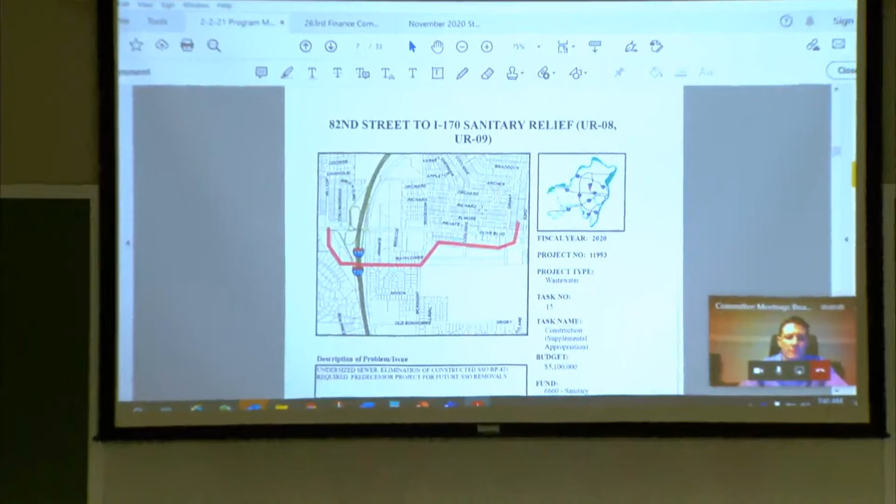The first item on the agenda will be a request from staff for introduction and adoption of this ordinance for the 82nd Street to I-170 sanitary relief. This item appropriates additional funds on an existing construction contract with J.H. Barrett Construction. The work being constructed is approximately 5,900 feet of sanitary sewers, 15 to 30 inches in diameter. The purpose of the project is to reduce inflow and infiltration in the University City watershed, reduce building backups, and relieve overcharged sanitary sewers. The project will eliminate one overflow and provide for the elimination of 4 additional overflows. This is a supplemental appropriation.

During actual construction of the project, the district design staff made a request that the upstream portion be lowered to accommodate a future project that will allow for elimination of other overflows. It was discovered during design that there was going to be an elevation conflict, so we made that request. Unfortunately, deepening of the sewer also deepened a tunnel, and when we dug the bore pit for the tunnel and started tunneling, we ran into rock and some mixed face soil conditions, which added to our cost on the project. The project's ongoing, at the location near the Interbelt and Olive, a very congested area.

We're asking for introduction and adoption, and for the appropriation of an additional $250,000. That $250,000 will bring our total appropriation for this project to $10,650,000. Are there any questions?

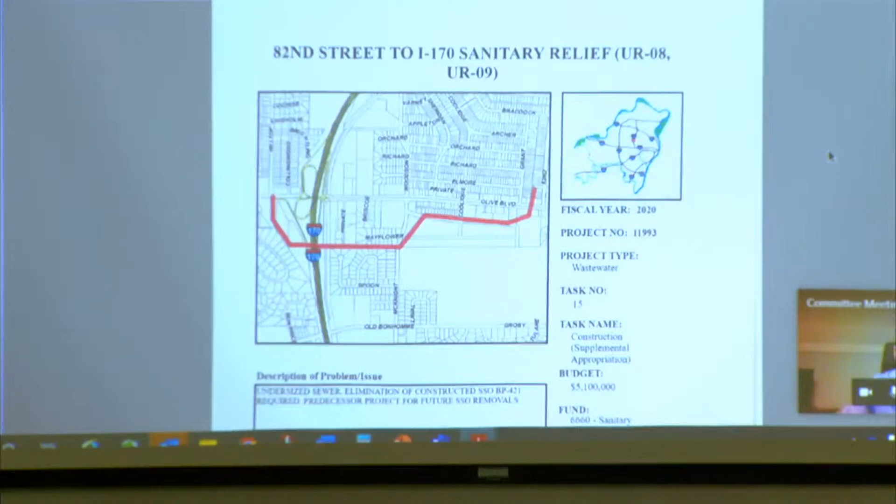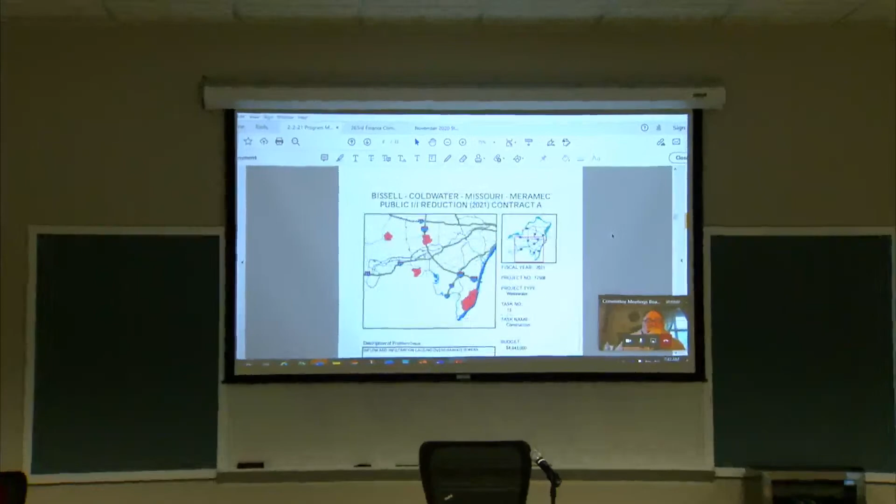All right, thank you. The next item is the Bissell Coldwater, Missouri Meramec Public I&I Reduction Contract A project. This action appropriates funds and authorizes staff to enter into a construction contract. The work will consist of the rehabilitation of approximately 63,000 linear feet of sanitary sewers, 6 to 18 inches in diameter, using the cured-in-place pipe method. We'll be rehabilitating 76 manholes, approximately 1,000 service connections, and making 30 point repairs on the sewer. The purpose of this project is to reduce inflow and infiltration in the Grand Glaize, Fishpot, and Fenton Creek watersheds. The district received 2 bids for this work. The low bid was received from SAK Construction. The bid was below our designer's estimate, and our appropriation of $3.1 million was below the budget for the project.

Most of our CIPP projects are funded with state revolving fund loan funds, which requires MWBE participation of 10% minority and 10% women. In this case, SAK is committed to over 20% participation from the firms listed on the write-up, which meets our 10% goals for the project.

Are there any questions? Hey Rich, the appropriation's 3.1 million, correct? Yes, did I say something? Okay, I just wanted to clarify, just to make sure. Apologize. Any questions?

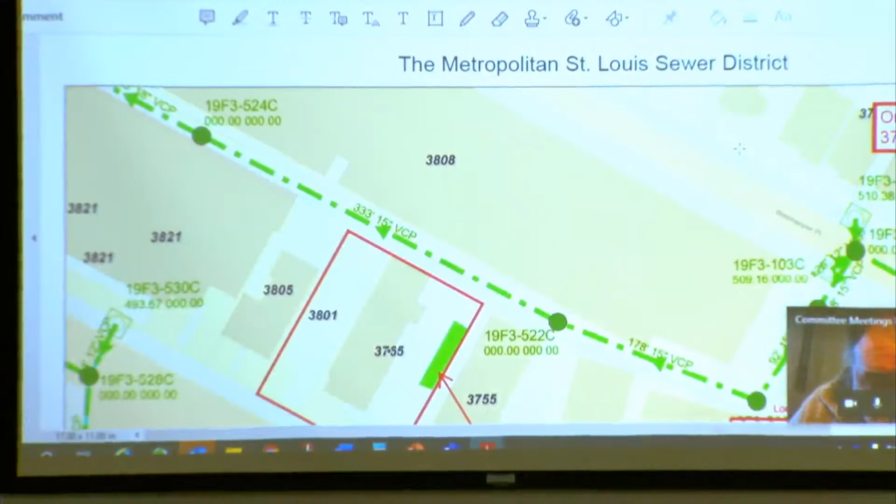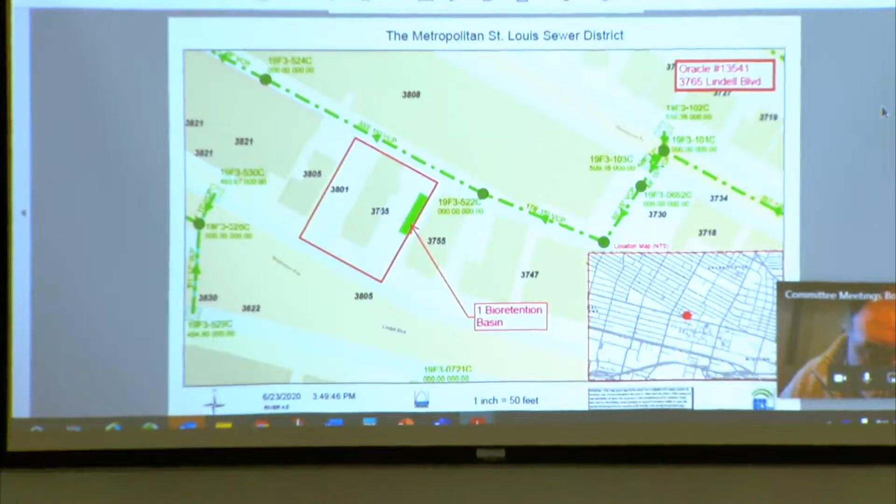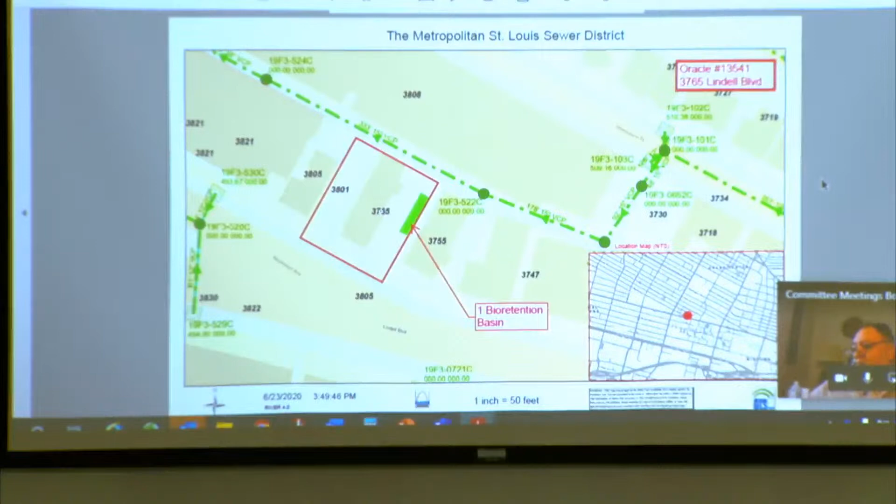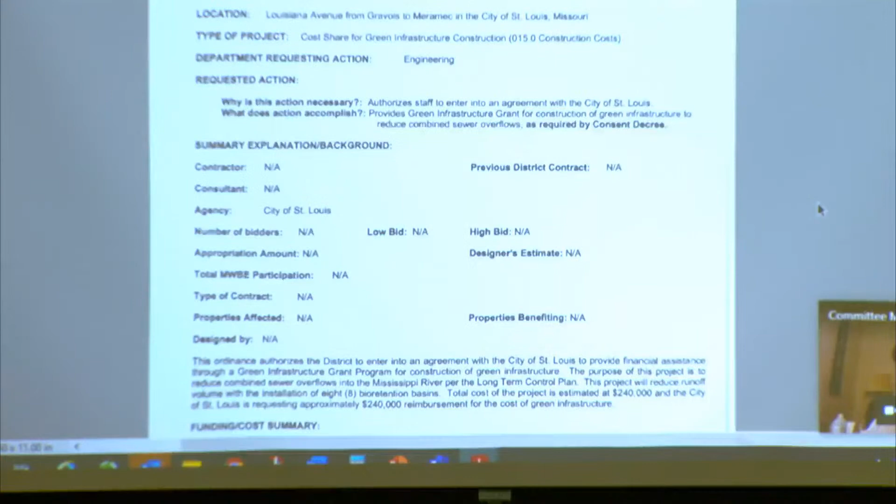All right, the next item is a CSO green infrastructure, Louisiana Avenue, Calm Street. This ordinance authorizes the district to enter into agreement with the city of St. Louis to provide financial assistance through the Green Infrastructure Grant Program for the construction of green infrastructure. Again, the purpose of the project is to reduce combined sewer overflows to the Mississippi. This project will reduce volume with the installation of 8 bioretention basins along this length of street. The total cost of the project is estimated at $240,000, and the city of St. Louis is requesting approximately $240,000 reimbursement for the cost of the green infrastructure.

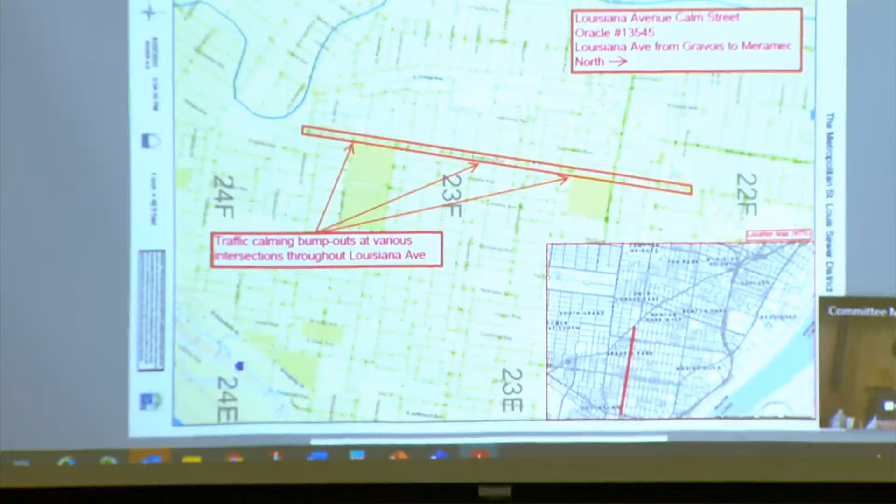Again, on the document provided, this is a calm street project that the city of St. Louis is doing on Louisiana. It goes from Meramec Street to Gravois, quite a long street. With the project, they're going to be building a total of 8 bioretention basins to capture stormwater runoff, again reducing the stormwater runoff to our combined sewer system on that street.

The next item is the CSO reduction green infrastructure Mill Creek Flats project. This ordinance authorizes us to enter an agreement with Mill Creek Flats LLC for financial assistance. Again, the project will reduce combined sewer overflows to the Mississippi River. The project will reduce the volume by the installation of 2 bioretention basins, permeable pavement, underground infiltration, and including a green roof on this project. The total cost of the project is estimated at $370,000, and the owner is requesting approximately $273,600 reimbursement for the cost of the green infrastructure.

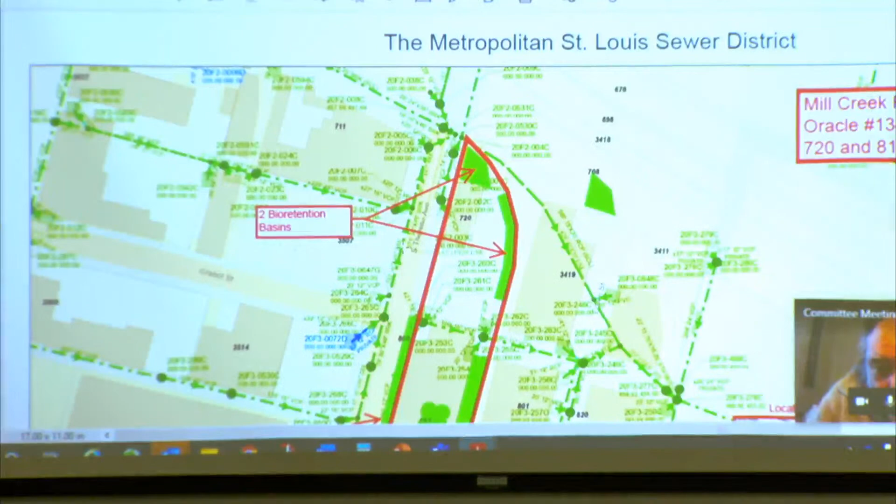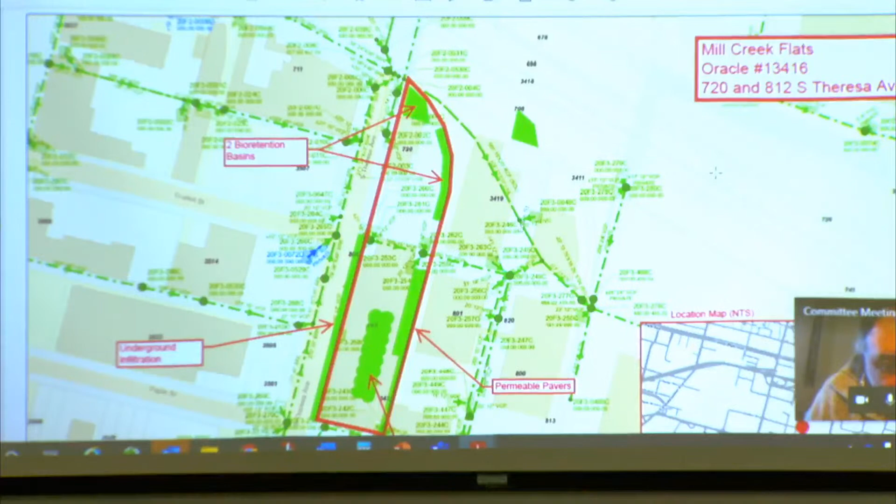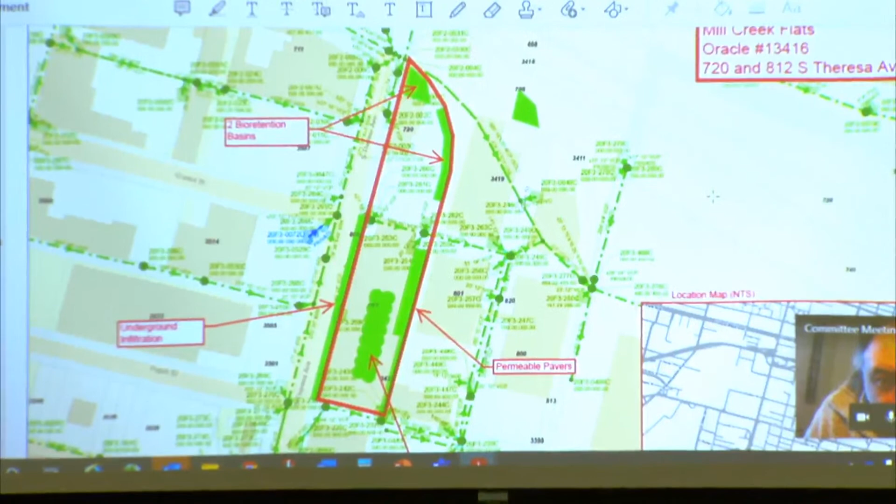Project location map - this is just down the street from us here in the Chouteau area, kind of in the St. Louis University Hospital area. As you can see, we've got a green roof, and along Theresa Avenue, they're going to be putting in some underground infiltration in addition to some retention basins. So quite a bit of green infrastructure going into this facility, which benefits our combined sewer system.

All right, the next group of items are all new construction jobs that we bid over the last month, so I'll be covering those. The first one is the Maline Creek CSO local storage facility rain garden. This action appropriates funds and authorizes the staff to enter a construction contract. The work to be done consists of construction of 1 bioretention cell of approximately 440 square feet. The purpose of the project, again, is to install green infrastructure and reduce flow to the combined sewer system.

In this case, rather than a grant, the district had a tunnel project that we did as part of our CSO program. With that, we built some pavement, so we're going to drain our pavement for this area to a bioretention basin. The district received 4 bids on the project. The low bid was from DJM Ecological Services. The bid was below our designer's estimate, and our appropriation of $60,000, which includes $10,000 for utility relocation, is below our budget for the project. This project did have a requirement for MBE participation, but since the bid was below $50,000, there was not a goal. As of this time, the contractor did not anticipate utilizing any MBE contractors, but if he does plan to use them, we will track that information.

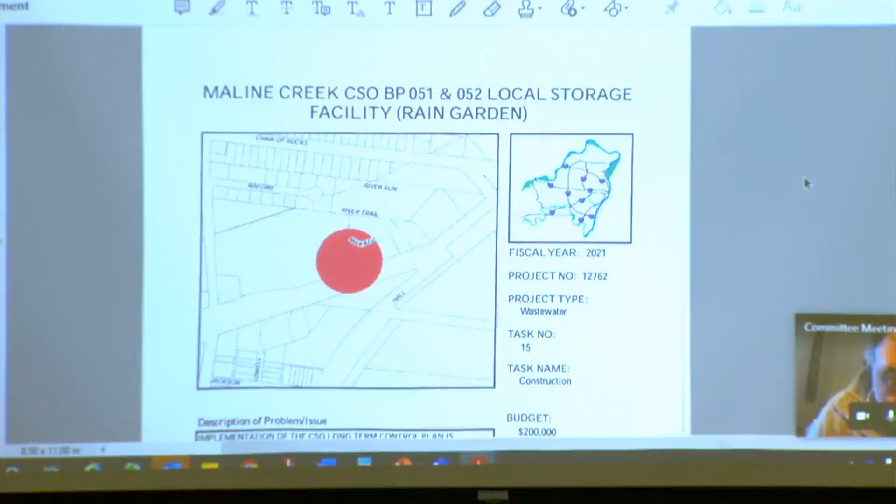The next item is the Midland Sanitary Relief. This action appropriates funds and authorizes staff to enter into a construction contract. The work consists of approximately 2,500 linear feet of sanitary sewers, 8 to 18 inches in diameter. The purpose of this project is to eliminate basement backups, relieve an overcharged sanitary sewer, and provide for the elimination of 2 constructed sanitary sewer overflows.

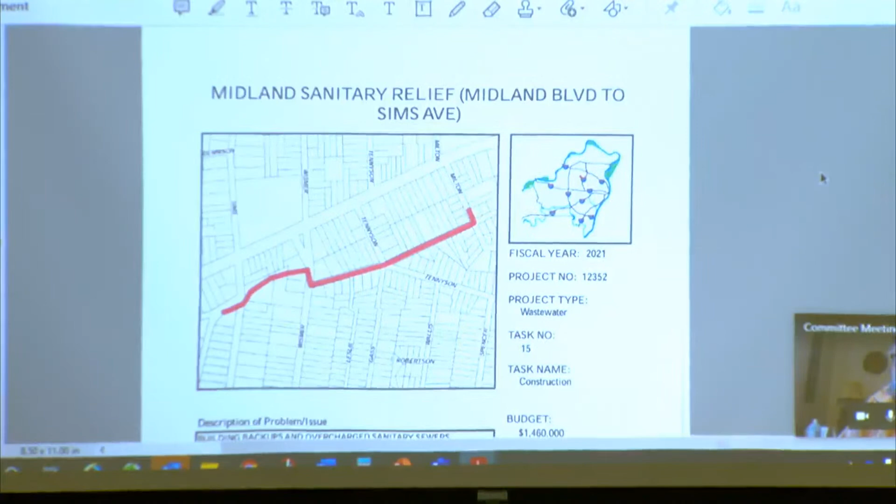The district received 7 bids on this project. The low bid was from Kolb Grading LLC, and it was below our design estimate. Our appropriation of $1.35 million, which includes contingencies and $215,000 for utility relocation, is below our original budget for the project. Kolb Grading is committed to 17% MBE participation, which meets our 17% MBE African American goal for the project.

The next item is the Watkins Creek Pump Station replacement. This action appropriates funds and authorizes staff to enter into a construction contract. The work consists of construction of a new submersible pump station at an alternate location outside the floodplain. The purpose of this project is to replace aging mechanical and electrical equipment and to address flooding issues from the backwater of the Mississippi River.

The district received 2 bids on this project. The low bid was from Plocker Construction Company, and it was below our designer's estimate. Our total appropriation is $7.9 million, which is below our 2-year planned appropriation. This appropriation at this meeting will be for $5 million, and there'll be another future appropriation of $2.9 million on the project.

Again, on this project, there was a 17% African American MBE goal, and Plocker Construction committed to that 17% on the project.

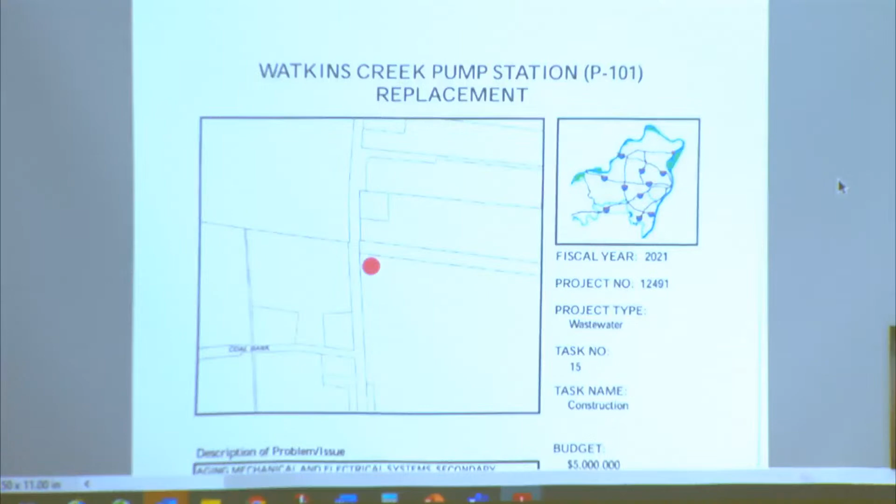The next project is Nottingham Estates Drive storm sewer. It appropriates funds and authorizes staff to enter a construction contract. The work consists of construction of approximately 243 feet of storm sewer, 15 inches in diameter. The purpose of the project is to alleviate yard flooding in the 5200 block of Nottingham Estates in unincorporated St. Louis County. The district received 9 bids for this particular project.

The low bid received was from Tailor Made Construction Company. The bid was below our design estimate, and our appropriation of $110,000 is just below the budget for the project. Tailor Made Construction has committed to subcontracting just over 17% MBE for African American participation on the project. I also wanted to point out that Tailor Made is an African American company, so we should receive full participation on this particular project.

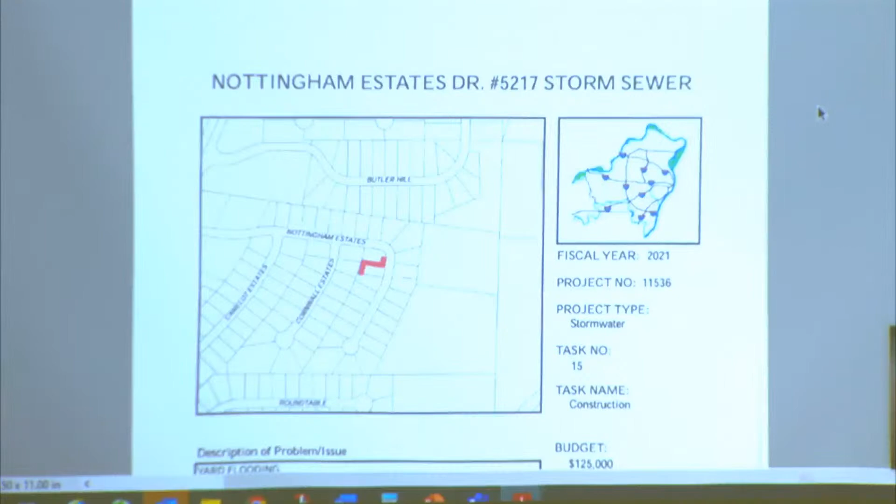The next item is St. Simon Court Storm Channel. This action appropriates funds and authorizes staff to enter into a construction contract. The work consists of construction of approximately 40 feet of storm sewers. The purpose of the project is to repair a deteriorated stormwater outfall to a creek at this location.

The district received 4 bids on this project. The low bid was from Kelp Contracting Incorporated, and it was below our design estimate. Our appropriation of $110,000, which includes $20,000 for utility relocation, is above our original budget for the project. Kelp Contracting has committed to slightly over 17% African American MBE participation on the project.

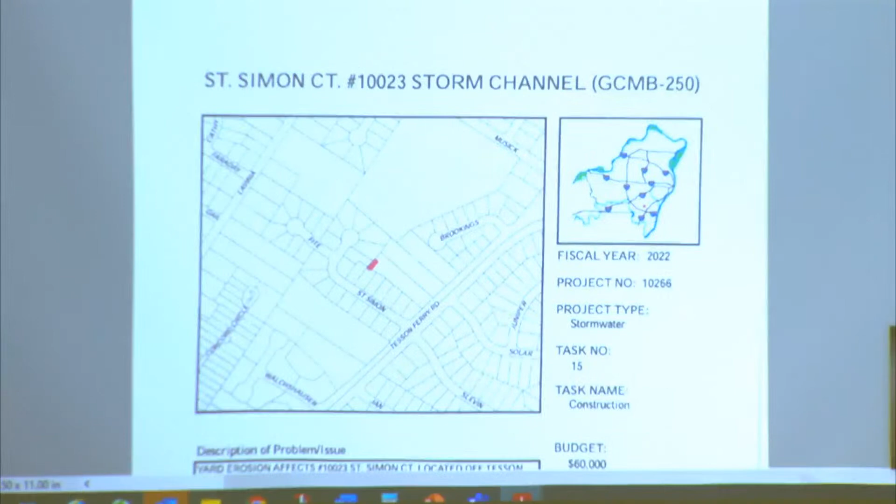The following item is, again, a request. We're asking the board to introduce and adopt this ordinance at next week's meeting. This is the Emergency Repair 065, a supplemental appropriation. The district brought this to you a couple months ago, and I'll explain the project in a second. We're coming now for additional funds.

The initial funds we appropriated were not going to be enough to make the repair, but allowed us to get in there, stabilize the situation, and assess what we needed to do to complete construction. Our contractor on the project is KCI Construction Company. The work includes temporary and permanent relocation of electrical and communications services and repair of a pipe failure. The pipe failure is directly below the electrical structure, approximately 15 feet below. When the electrical is secured, an excavation will begin to determine the extent of the failure, and we'll complete the repair at that time. Based on staff recommendation, the executive director approved this emergency on October 26th. The contractor KCI was selected per our policies.

Additionally, what we found during our exploratory work is that, as it's located at our plant, you'll see with the diagram I provided, we have a hill above us and a hill below where this excavation was to take place, and there are quite a few district facilities in this area that have come into conflict. So the first order of business was to stabilize the bank above where we're going to be excavating. Now we can go to the diagram for a brief description.

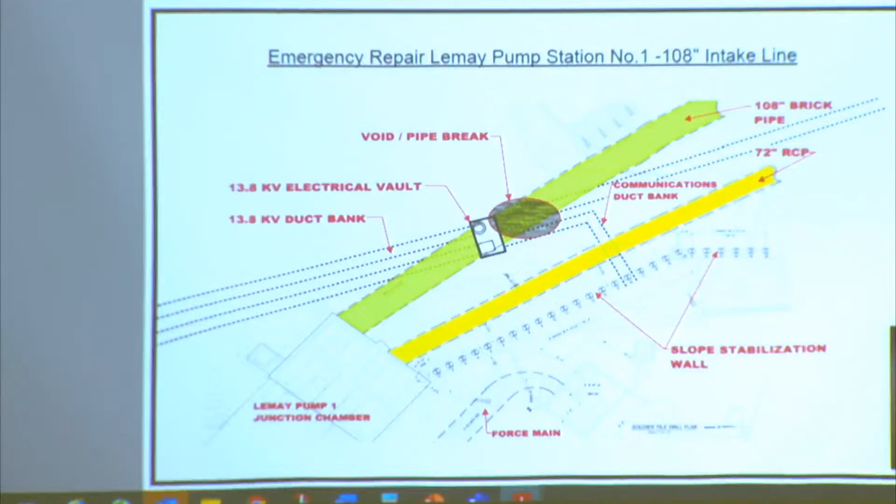The first diagram is actually a schematic of what's going on there. The green line is a 108-inch brick sewer that was built about 100 years ago. That provides all the sanitary flow under River des Peres into our pump station.

The yellow line is another 72-inch sanitary trunk sewer that comes from the Gravois watershed that also drains in. These are both directly below the bottom of River des Peres, and they flow into the pump station along this bank. The dotted lines you see are the electrical and communications lines that run from our pump station at Lemay down to all of our pumping stations and gate structures along River des Peres.

All these electrical conduits and communications duct banks serve those pumping stations. So this is a highly critical project, because if we lost that electrical bank, or even either one of those sewers, we would have a major sewer spill or lose communications and power to those facilities.

What we found was a void directly underneath the square vault shown there. We started to dig on that to get down to the 108 to see what needed to be repaired. The hillside above us started to slide, so we had to stabilize it. You'll see what looks like a line of eyes there - that's shoring the district has put in place to stabilize the bank above us and keep it from sliding down.

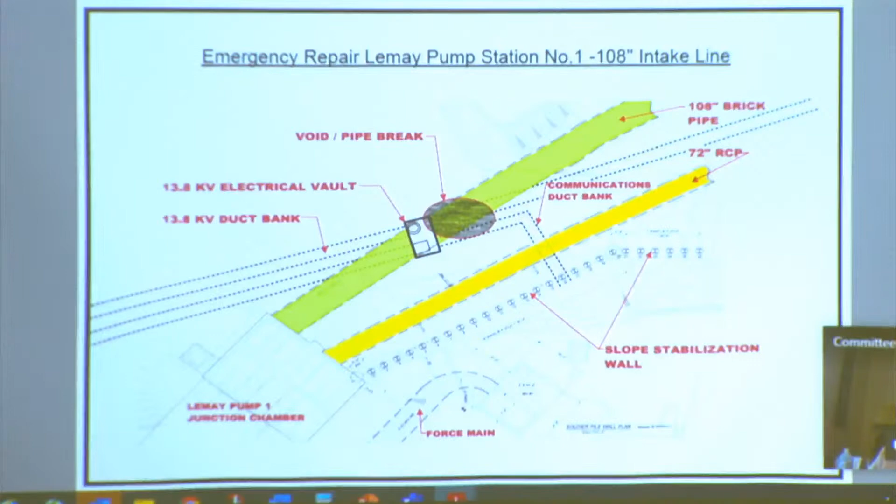If there's any issues with either one of these two major trunk sewers, we would be able to make the repair without affecting the electrical box. So the total additional appropriation we're asking for is approximately $2 million, which will bring the total appropriation on the project to $2.5 million. I do have my project manager here in the meeting today, Kent Kotoff, if there are any questions.

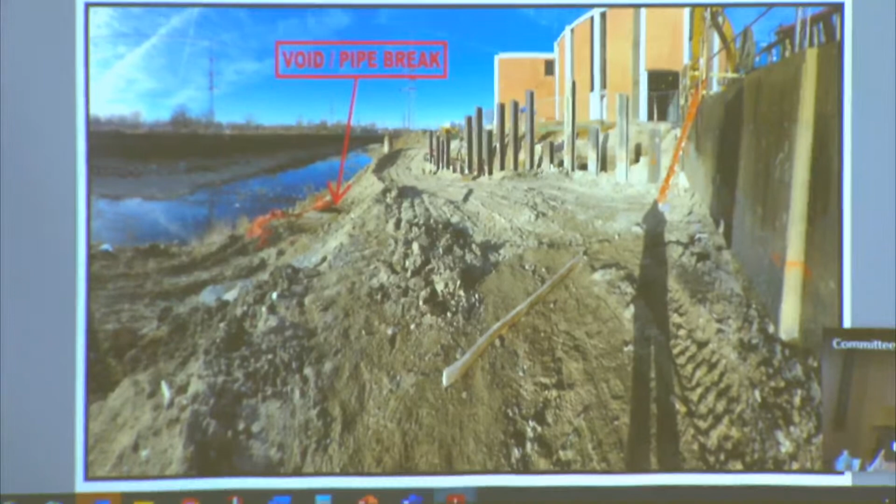Can I ask a question? Sure. On the diagram where it says void pipe break, where's the sewage going when there's a break like that?

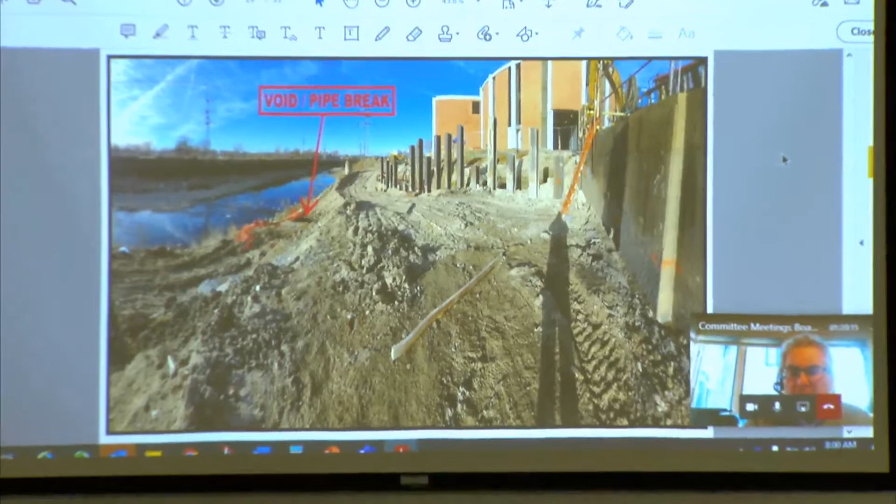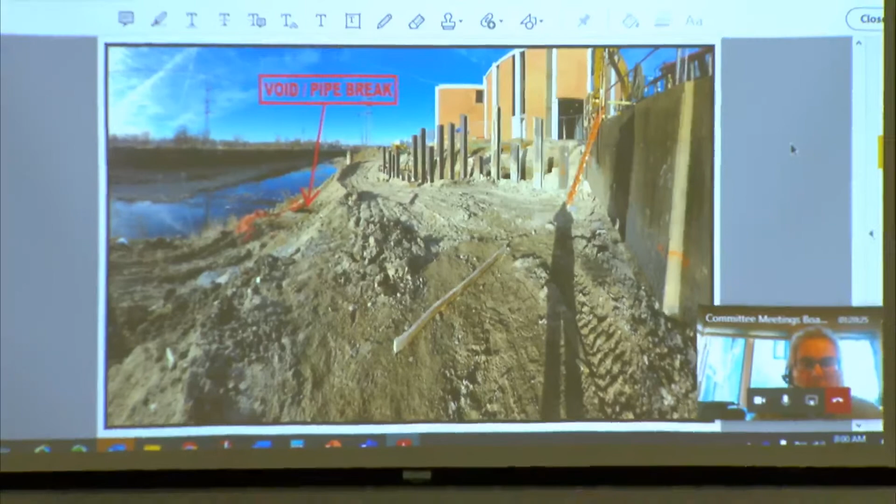Is it? It's actually a cave-in from the top, from the surface. The sewers are flowing fine. It's going on through, but what you're getting is water from the surface that then goes down into the sewer. It's not a lot, but it's created enough of a void that it's put the electrical structure in danger of damage.

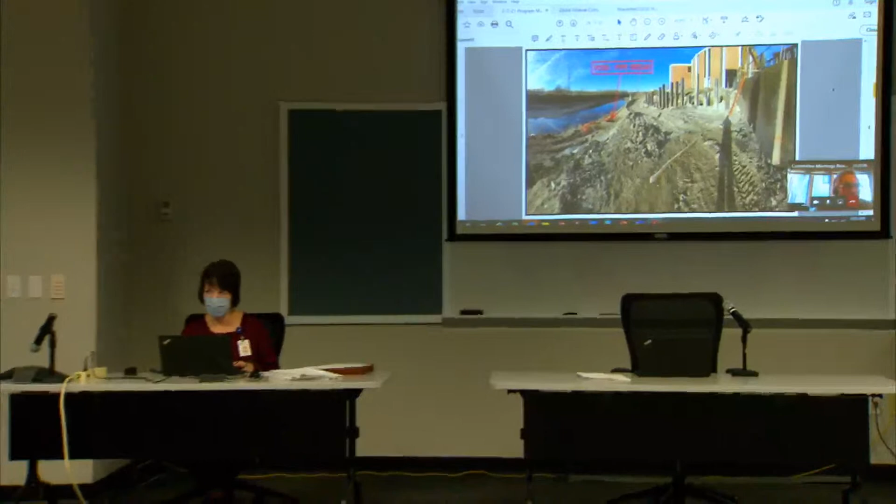You'll hear us refer to it as a cave-in. If you see a cave-in on a street, it's usually water from the surface getting down to the sewer. So what we'll do, Mr. Singer's crew will dig down and make the repair. We did look at the sewer.

In other words, we floated a camera down this 108-inch sewer, which has quite a bit of flow in it, and we could see water leaking in from the surface. We weren't able to see quite the extent. We don't think it's a large hole in the top of the sewer, but we do need to get in and make the repair before it gets much worse.

Thank you. Are there any other questions?

Thank you. Just two more items. Both of these items are requests from staff to proceed to easement condemnations on projects we have planned to construct, where we've been unable to acquire the easements in a timely manner, and we need authorization to proceed to condemnation in order for the property owners to get into a formal discussion.

The first project is the Bellevue Avenue Lateral Sewer. This ordinance authorizes staff to proceed with further condemnation efforts, including the filing of all necessary court pleadings and documents, leading to the acquisition of permanent easements or construction easements on one parcel of ground in the city of Richmond Heights. The easements and temporary constructions are needed to construct a project which consists of...

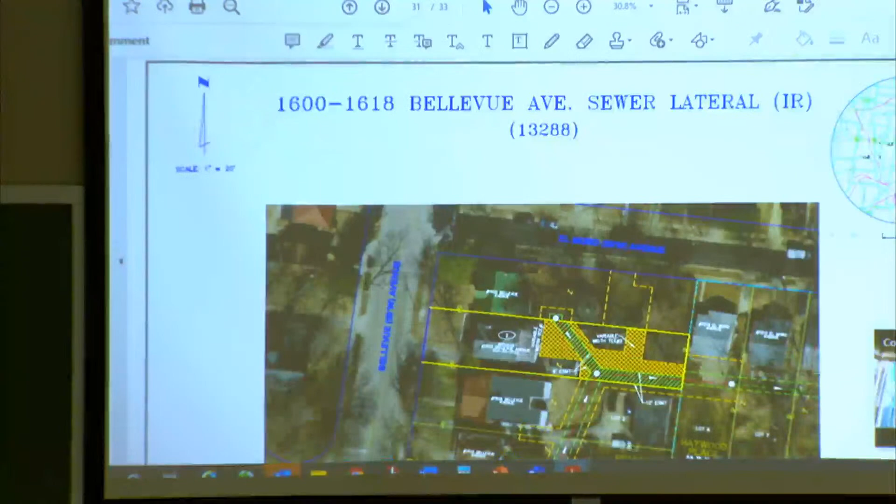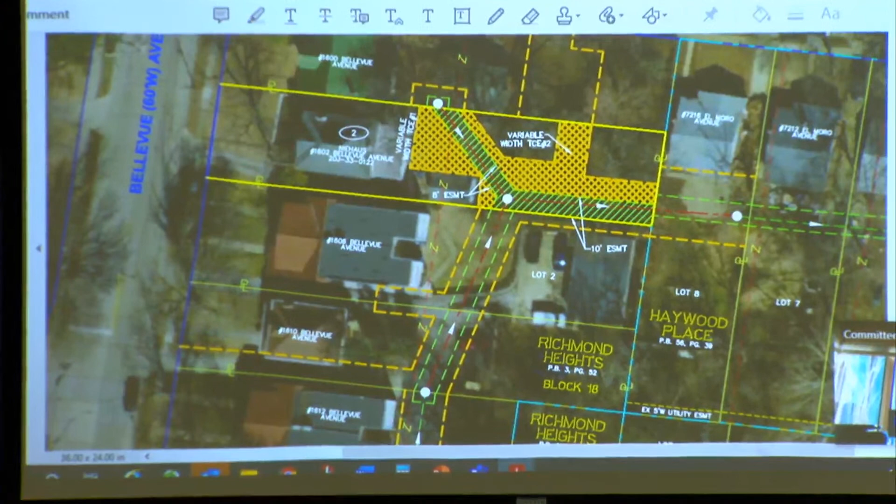If you go to the drawing showing the location, the property that's in yellow there - obviously we're doing quite a bit of work on that person's property. So we've made an offer for both the permanent and temporary easements, and tried to work with the owners, but we're quite a bit far apart on the compensation for the easement. We're still talking with them, but at this point we feel like, in order to complete the project and get the sewer built like we need to, we need permission to proceed to condemnation.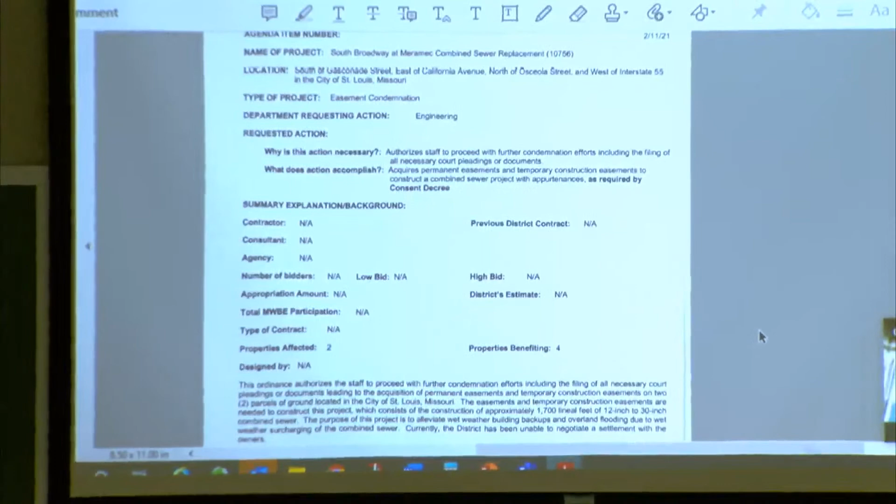All right, the last item is the South Broadway at Meramec Combined Sewer Replacement Project. This ordinance authorizes staff to proceed with further condemnation efforts, including filing all necessary court pleadings, for the acquisition of permanent and temporary construction easements on 2 parcels of ground located in the city of St. Louis. These easements are needed to construct a project consisting of approximately 1,700 feet of 12 to 30-inch combined sewer. The purpose is to alleviate wet weather building backups and overland flooding. This combined sewer needs to be replaced with a larger line to avoid basement backups and prevent localized flooding at this location.

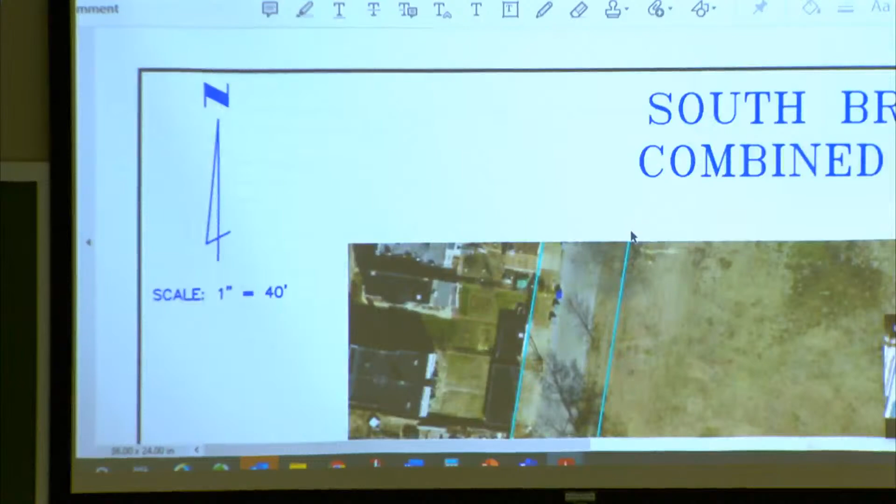The district required 2 easements on this project and has been unable to get either one. If you look at the sketch, the 2 parcels are right next to each other, and most of the rest of the construction is actually in the street. Parcel number 1, at the top, is a property owner where we had difficulty making contact. Once we did, we found there was a change in ownership, and now we're having difficulty talking with the new owner. So in order to complete this project, we're requesting to go to condemnation.

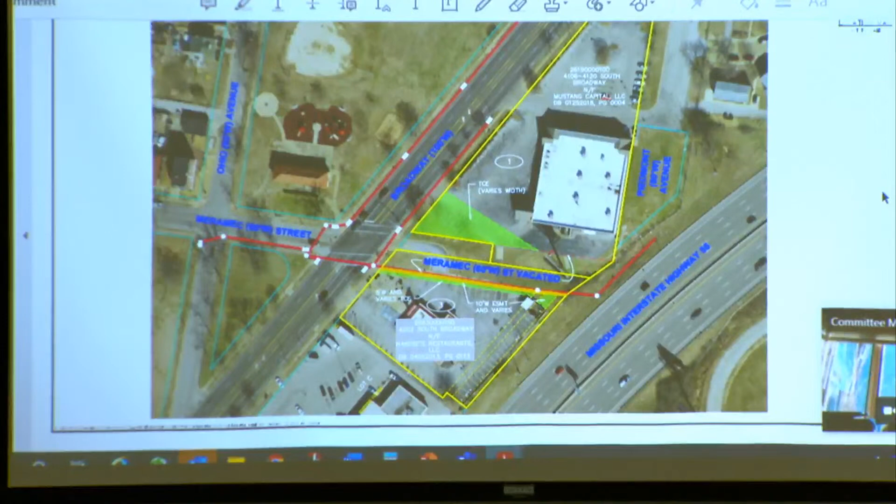The second property, at the bottom of the page, labeled parcel 2, is actually a Hardee's restaurant. As you can imagine, coordinating and getting an easement from a fast food restaurant involves working out all the details regarding keeping them open and not disturbing their work. We have a contact there, but apparently the contact has changed several times, so we're having difficulty getting to the negotiation table on this property. Giving us permission doesn't necessarily mean we will go to condemnation. Generally we're able to work things out, but having the permission usually gets their attention enough to bring them to the table for discussions.

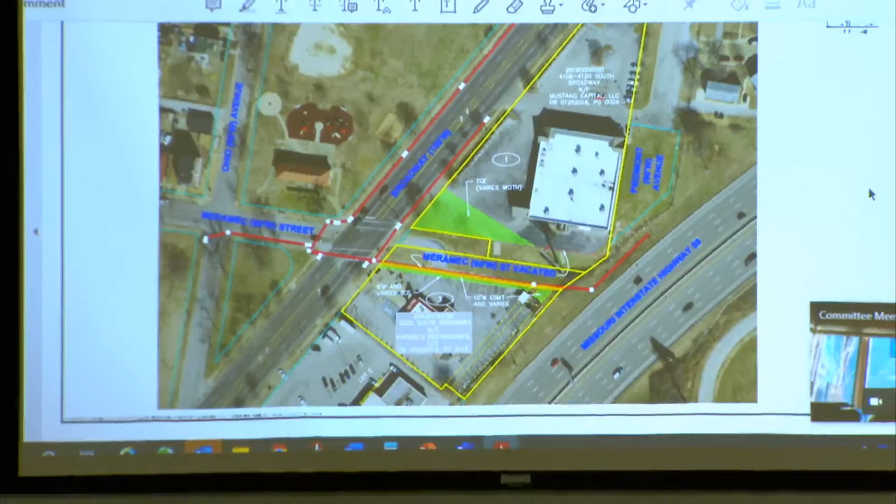Any questions on that? If not, trustee, that concludes my report.